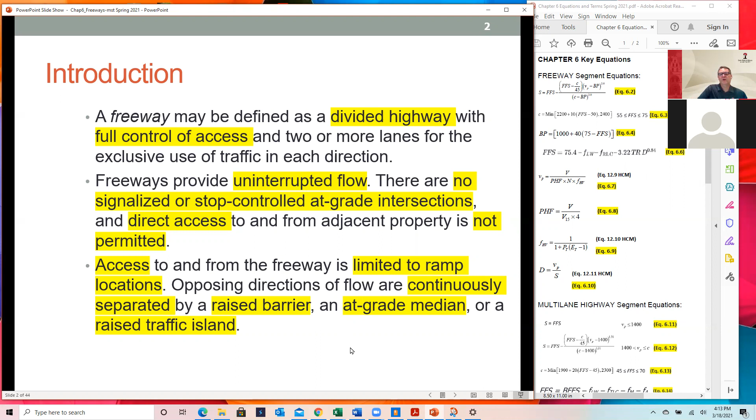And there are all kinds of design parameters as to when you have to use a barrier and when you don't.

So, what we're going to be looking at is the operating conditions of freeways. We're assuming all these cars are being driven by human beings. We've talked a little about autonomous vehicles and how that may be coming in the future, but chapter 6 is really all about operating freeways where you have human beings driving the vehicles. So it's the interaction among vehicles, drivers, and the geometric characteristics of the freeway, and we'll get into what some of those geometric characteristics are.

The operations on freeways can also be affected by environmental conditions. Obviously if it's raining, any of you who have lived in areas with more inclement weather than San Diego, people drive in bad weather conditions all the time and they're generally better at it than here in San Diego. If we get a little rain here, drivers get a little crazy because they're not used to it. They're used to driving in conditions like right now, sunny and beautiful.

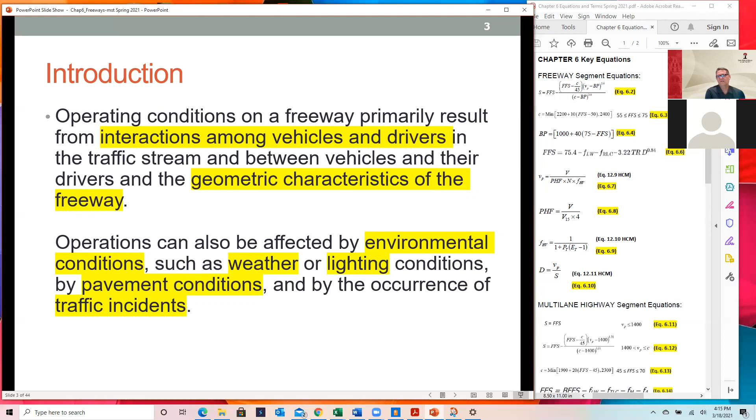Lighting conditions can affect freeway operations. Pavement conditions too, and pavement can be related to weather. The first rain after many months of no rain, the oils in the pavement come to the surface and it's slicker than normal. And finally, incidents, traffic incidents, accidents, stalled vehicles, anything unusual that impedes the flow of traffic. So there are 3 components of freeways that we're interested in evaluating.

The first is basic freeway segments. So those are the segments of the freeways not really influenced by ramps or weaving areas, which I'll describe in just a second. Basically, the longer stretches of freeways in between the interchanges where the vehicles are flowing.

Then weaving areas are segments of the freeway. I like the term weaving because I think most of us as drivers understand what that means right away, since we've all dealt with it. It's where two or more vehicle flows have to cross each other's path along the length of a freeway. So if you're in the right-hand lane on a freeway and the interchanges, the on-ramp and off-ramp, are spaced fairly closely, you've got vehicles jockeying for position, weaving back and forth through that right lane, some trying to get on the freeway and some trying to get off.

As it says here, weaving is usually formed when an on-ramp is followed by an off-ramp, and the two are connected maybe by an auxiliary lane. There might be an extra lane to allow for the weaving moves to be made.

Then merge and diverge areas, those are the points where on and off ramps join the freeway. The junction at that point is an area of turbulence because you've got vehicles flowing in different directions. And just a word of caution, every now and then when you look at, in particular, an off-ramp, as the ramp moves and diverges away from the main freeway lanes, the area in between the main freeway lanes and the ramp is often called the gore of the ramp, where the two come together.

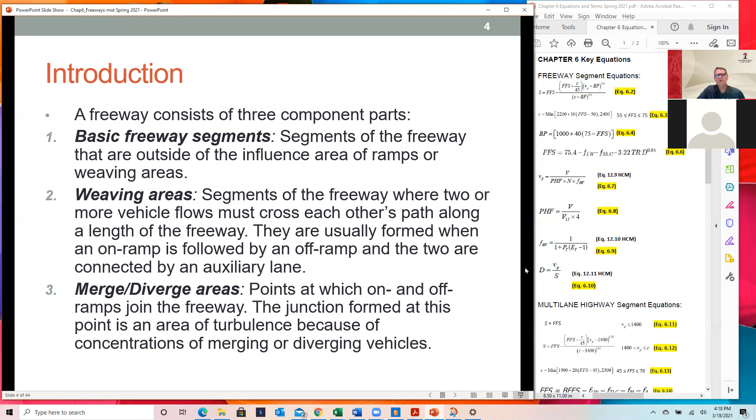Every now and then I see people pulling their vehicle over into the gore area of a ramp, whether it's because the vehicle is experiencing problems or maybe somebody's just pulled over to take a call. That is probably the worst place you can possibly pull your vehicle over on a freeway, because it's a decision point. We've all seen people make last-second decisions to either exit or, if a vehicle is exiting, decide they don't want to and drive through that gore point. So it's not a very safe place to be.

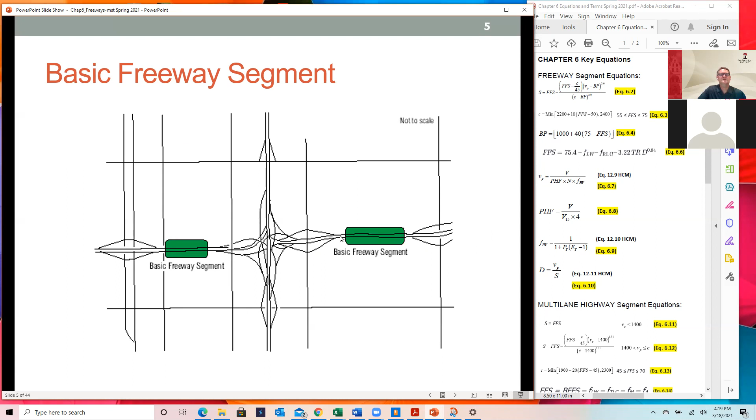So the way we measure performance of freeways is through three things. Density, which we've defined previously in terms of passenger cars per mile per lane, because we're talking about freeways. Freeways by definition rarely have just two lanes, one in each direction - extremely rare. If you find a two-lane freeway like that, it's probably temporary in nature, or it might be in a super rural area, but even then there's no passing opportunities. It's very rare to see a freeway that is less than 4 lanes, 2 lanes in each direction. So density is in passenger cars per mile per lane, speed in terms of mean passenger car speed, and volume to capacity ratio. These are the 3 things.

And so these measures kind of tell you how well or poorly traffic is flowing on that particular freeway segment.

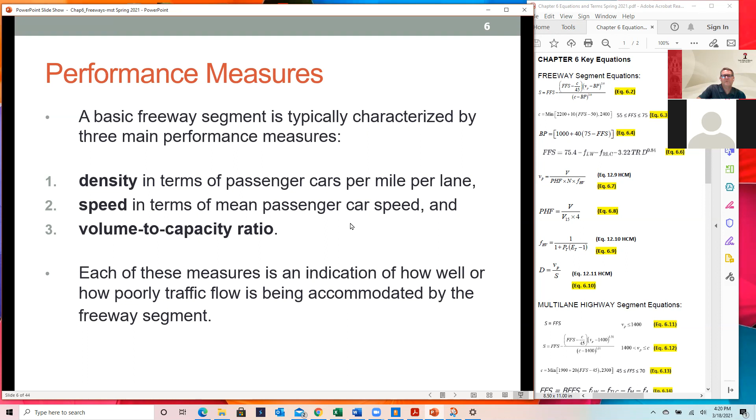Speed is an important indicator of service to drivers, but freedom to maneuver and proximity to other vehicles are also important. Think about yourself driving: if there are tons of cars in the lanes next to you, in front of and behind you, and the spacing feels closer than comfortable, you feel surrounded by traffic. That can impact your driving, and drivers tend to slow down because they get a little nervous under those conditions.

That relates to the concept of density. The more dense the traffic stream is, the more impact there's going to be on the speed and flow of traffic. Density increases as flow increases, up to capacity.

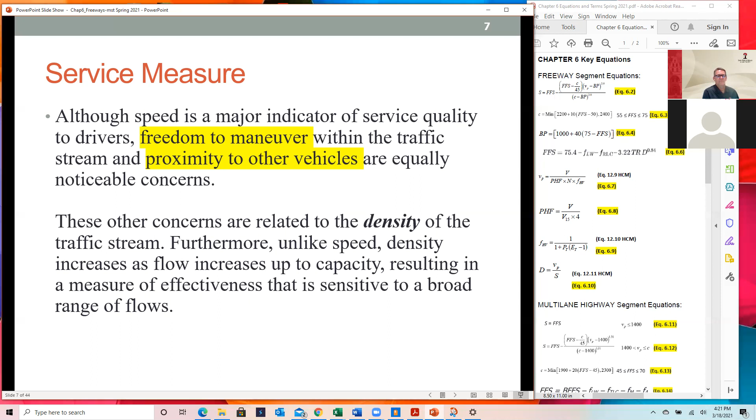This leads to the concept of level of service, or LOS. Maybe some of you have heard of this before, maybe not. Level of service is directly related to density, measured in passenger cars per mile per lane. Level of service A represents lower density, and level of service F represents higher density.

Level of service F means that demand for use of that segment of freeway exceeds its capacity - stop and go traffic. Level of service A is basically free flow with no impedance, with a density of 11 or less. Level of service B is still fairly good flow, and C is good flow on a freeway. As you move up, level of service D starts to show some congestion. Level of service E is very unstable, almost at capacity - just under it. And level of service F is just that, at or over capacity.

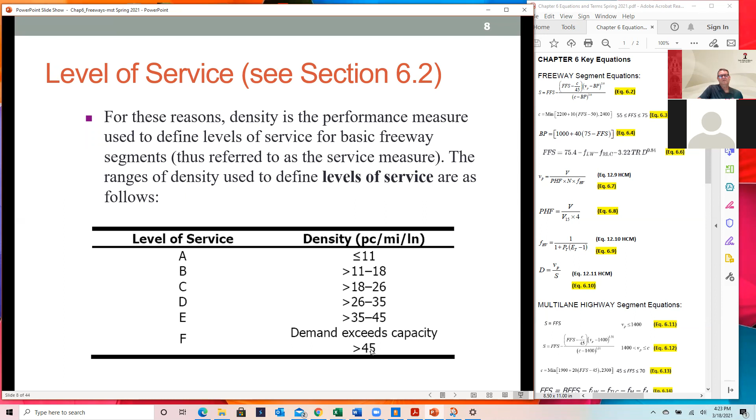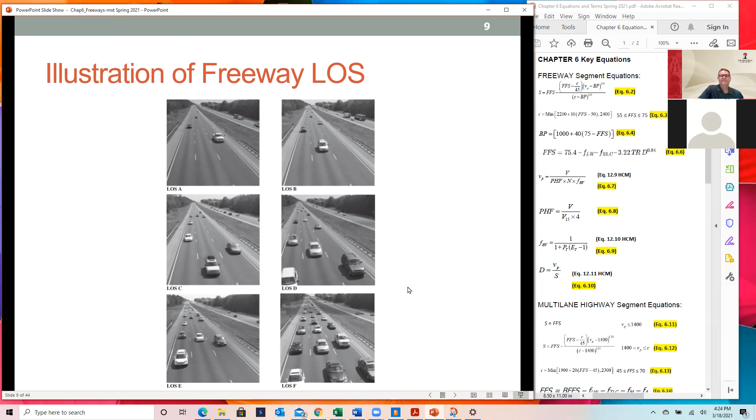So there are ways to measure the level of service and the capacity calculations of freeway segments, and we're going to go through the equations. Ultimately, you're calculating the density of the freeway segment so you can match it to the table for levels of service and determine the LOS, or calculate a volume to determine whether that volume can be handled by the number of lanes you plan for your freeway segment.

The first few equations listed here are the speed and flow relationships. There's a figure showing a breakpoint for the flow rate. If your flow rate is below the breakpoint, the speed used in your calculations just equals the free flow speed - meaning you're at a level of service that isn't impeding traffic flow.

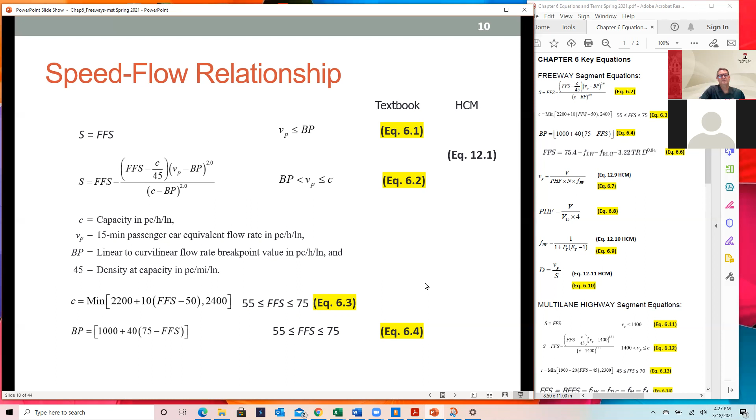Using this, if your free flow speed is between 55 and 75 miles per hour, there's a breakpoint equation you use. We'll go through some problems, but these are important equations to evaluate to calculate your speed, which will ultimately be used in a density calculation so you can determine your level of service.

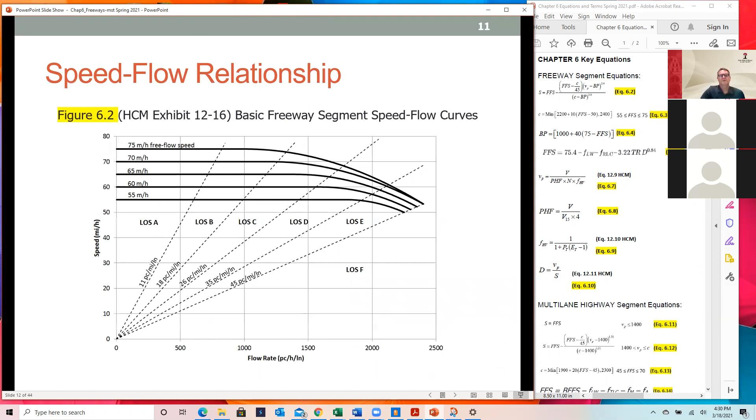On the exams, I generally provide both as an attachment, the table and the figure. You can decide which one you want to use. In the figure, you obviously have to do a little bit of estimating. In the table, you might need to interpolate, depending on what you have in your problems.

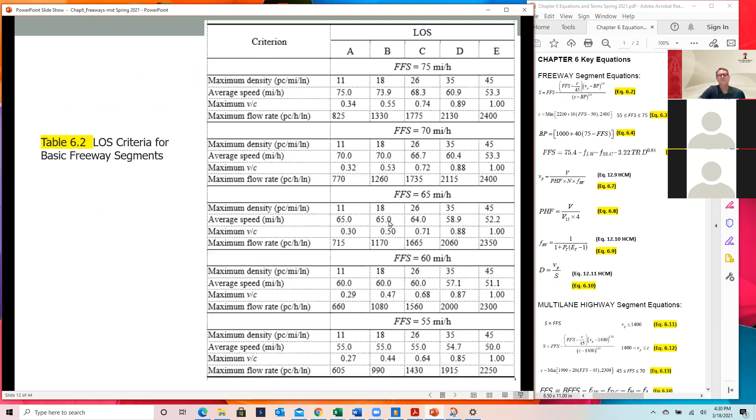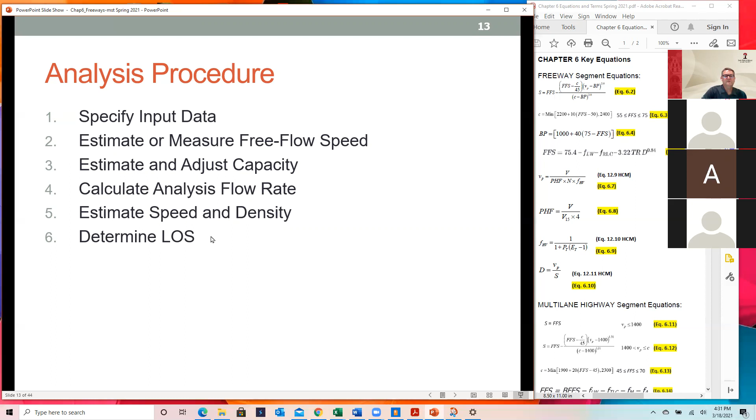So how do you go about doing the analysis procedure for freeway segments? You have to specify the input data, just like every problem. The first thing you do is figure out what your free flow speed is, then you need to consider capacity, and calculate your analysis flow rate. Then you estimate your speed and density, and finally from that density you can determine what your level of service is. We're going to go through all of this - this is just the basic.

This is also important: the equations we're going to go over are basically factors that actually reduce the speed based on things that have an impact on speed, but it's all based off certain base conditions. The base conditions for freeways assume lane widths are 12 feet, and the vast majority of freeway lanes you'll find out there are 12 feet wide.

There are some segments that have maybe 11 feet. It's pretty rare to find 10-foot lanes on a freeway, maybe in a really highly urbanized area where the right-of-way is very restricted, but generally not. The minimum right shoulder lateral clearance between the edge of the traveled way and the nearest obstacle is 6 feet, and a minimum lateral clearance in the median is 2 feet.

So the bottom line is, if you're dealing with lanes that are less than 12 feet, or a lateral clearance of less than 6 feet on the right side, you're going to have to modify your speed calculations downward, because narrow lanes or limited lateral clearance tend to slow drivers down. That's basically what you'll find as we go through this.

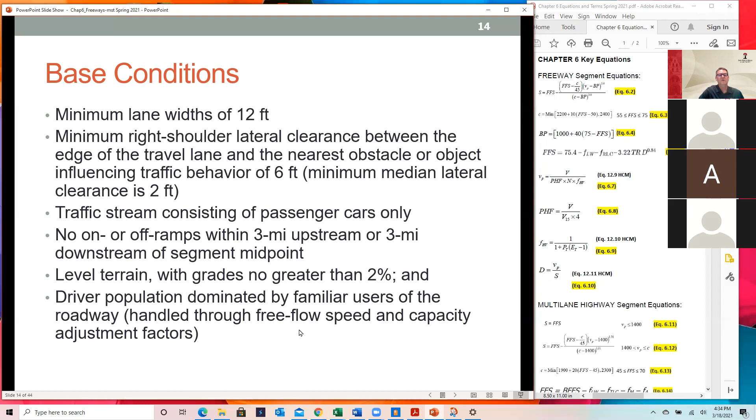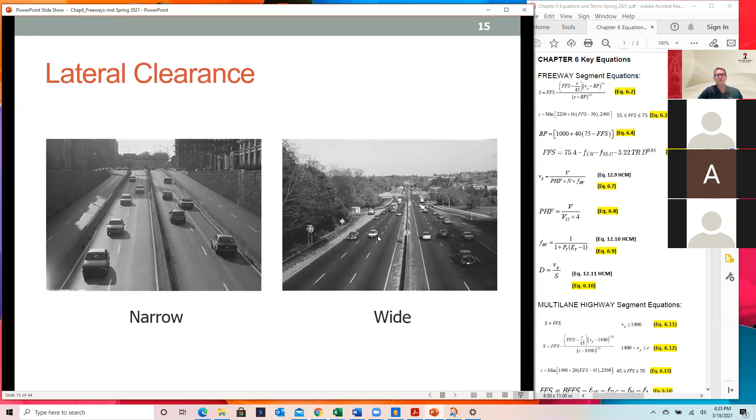So anyway, just a few photos to show what we're talking about. This is very narrow lateral clearance. On the right hand side, you can see there's a barrier just to the right of the traffic on both sides, and virtually no clearance from the center barrier. So these vehicles feel locked in pretty tight, versus this side where you've got a shoulder on the right and some clearance in the median as well. So these vehicles generally are going to feel a little more free flowing than those over there.

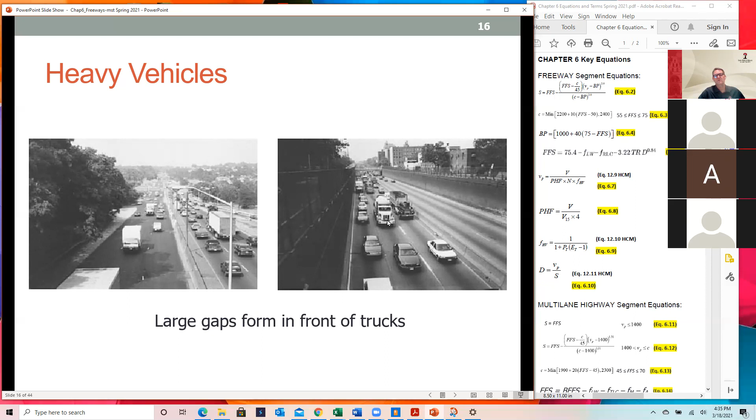Heavy vehicles, this is just an example. Especially in this photo, I think it's a good one - it shows large gaps forming in front of trucks. This is very typical: when you have large trucks, there are gaps in front of them in the traffic because they're slower moving than the regular vehicles.

So free flow speed is a concept we're going to use in the analysis of freeway segments. It's the mean speed of passenger cars measured under low to moderate flow rates. In other words, you don't have to be at level of service A, that first photo I showed you where there's hardly any cars at all, but you don't want to be at level of service E either, where there are a lot more cars, and all it takes is somebody flashing a sign or something to cause the vehicle flow to break down.

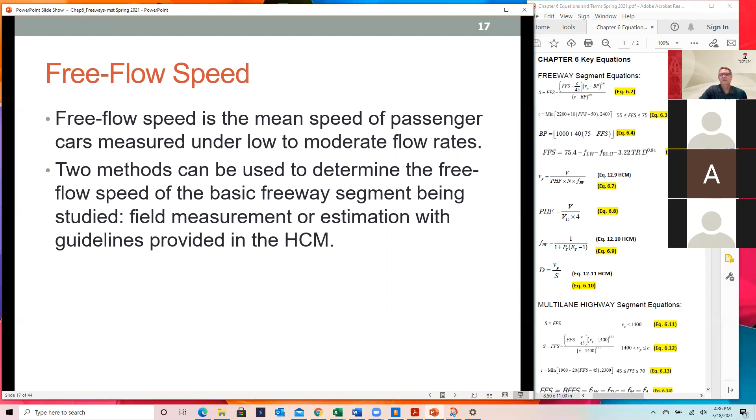There are two methods to determine free flow speed: field measurement or estimation with the guidelines provided through the HCM, the Highway Capacity Manual. I've already defined it, but just a reminder that when you see HCM, that's what it refers to. You might be working a problem where it says the free flow speed is X, assuming it's actually field measured. But there are other ways of defining the free flow speed, which we will go through.

Estimating the free flow speed is mostly what we're going to be doing in this section on freeways. You adjust the base free flow speed downward to reflect the influence of three factors: lane width, lateral clearance, and ramp density. All three of these will have an effect on the free flow speed - narrower lanes, lesser lateral clearance, and more ramps will generally cause the free flow speed to drop.

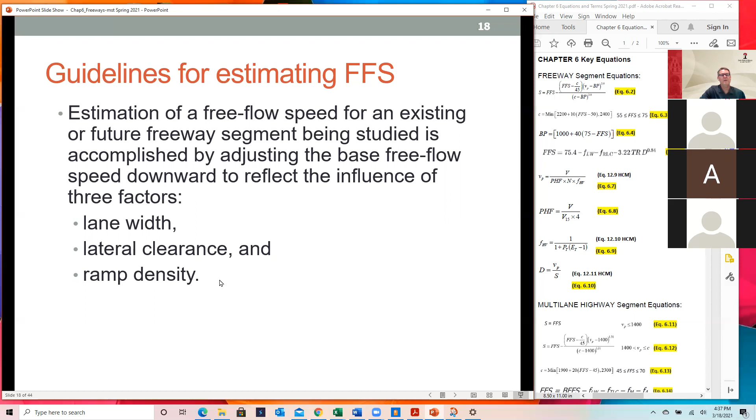So this is a very important equation, one that you will definitely be using. It comes right out of the Highway Capacity Manual, equation 12.2, but it's equation 6.6 in your book. This has been developed over many years of analysis and empirical observations, etc. So the free flow speed is equal to the base free flow speed in miles per hour, which is 75.4.

Again, kind of an empirical number that's what you'll use for calculations. There are places in this country, like Utah, where I think the speed limit's 80 miles per hour, a couple places where you actually have speed limits higher than this base free flow speed. But this is the equation, this is what you'll use.

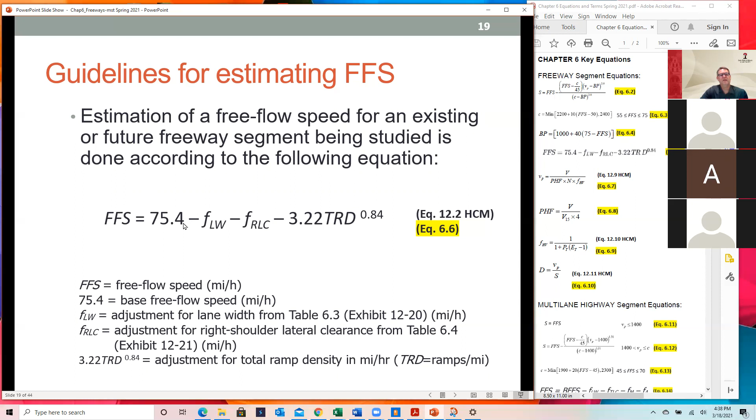There's an adjustment factor for lane width, FLW, and we'll go through these. Then an adjustment factor for the right shoulder lateral clearance. And then an adjustment factor for total ramp density, TRD. All of these are adjustments. You assume you start at this miles per hour, and based on these adjustments, you'll end up with a free flow speed of something less than 75.4.

So let's go through it. The first adjustment factor is lane width. It's very simple, table 6.3 in your book. It says if you've got a lane width of 12 on your freeway, you don't have to adjust it at all, the adjustment's 0. Remember, if you go back to the equation, that means you're subtracting 0, so it doesn't have any effect. However, if you have 11-foot lanes, you need to reduce the free flow speed by 1.9 miles per hour. And if you have 10-foot lanes, which in California are pretty rare, you have to adjust by 6.6 miles per hour. Not insignificant, this is almost a 10% reduction in speed because of lane width.

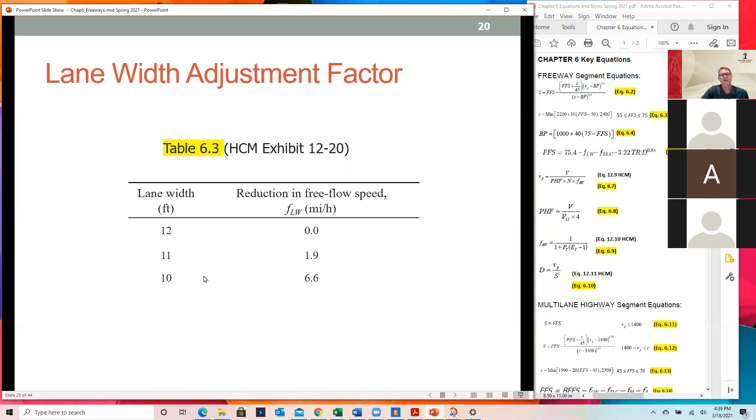Then you've got the lateral clearance factor. The reduction in miles per hour depends on the actual lateral clearance and how many lanes you have in one direction. Obviously, if your lateral clearance is more than 6 feet, it doesn't matter how many lanes you have, there's no adjustment. On the other hand, if your lateral clearance on the right-hand side is only 2 feet, you have to adjust by 2.4 if there's just 2 freeway lanes in one direction, by 1.6 if there's 3, by 0.8 if there's 4, and so on. You can take a look at this table, again pretty simple to apply this factor.

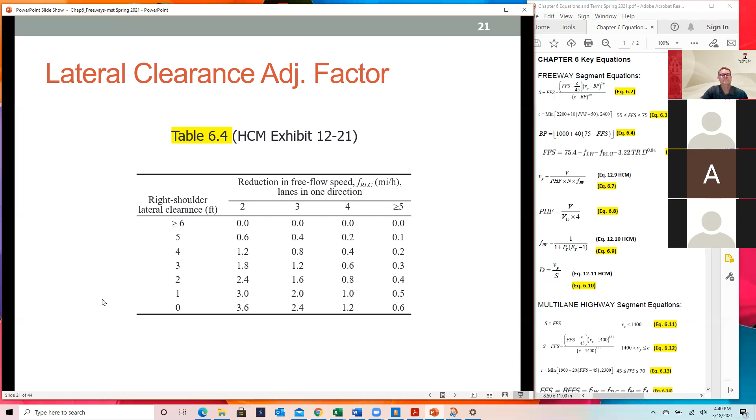The total ramp density is really a matter of just adding up the number of on and off ramps in one direction within 3 miles upstream and 3 miles downstream. Then you divide it by the 6 miles so you end up with the number of ramps per mile. So let's say there's 3 ramps 3 miles upstream and 3 ramps 3 miles downstream. You divide that by 6 and your total ramp density is 1.0, right? You've got a total of 6 ramps in 6 miles, just as an example.

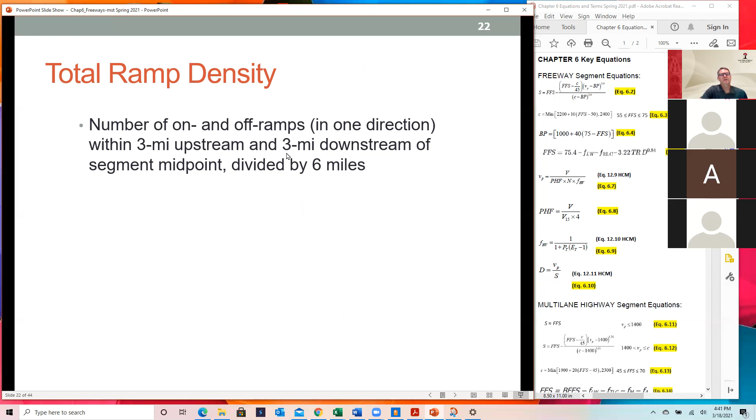So what you want to do is calculate your analysis flow rate. You'll see I've got a lot of these equations. They're listed over here, highlighted because these are the things you're going to need to use to do your calculations.

This V sub P is the 15-minute passenger car equivalent flow rate in passenger cars per hour per lane. V is the hourly volume in vehicles per hour, which is oftentimes a given, or you might need to calculate that - that might be the problem, asking you to figure out what the volume should be, but oftentimes it's given. The peak hour factor, we'll define these terms and you'll see how to calculate it in a second. N is the number of lanes in one direction, not in two - if it's a 4-lane freeway, N would be 2, because we're talking about traffic flow, which is directional. And then finally, there's going to be a heavy vehicle adjustment factor.

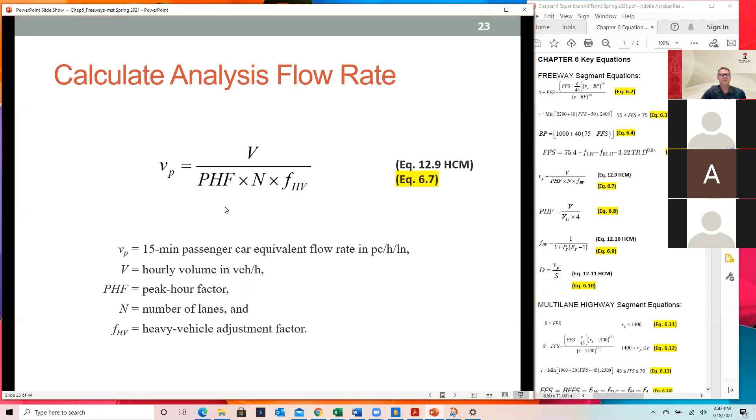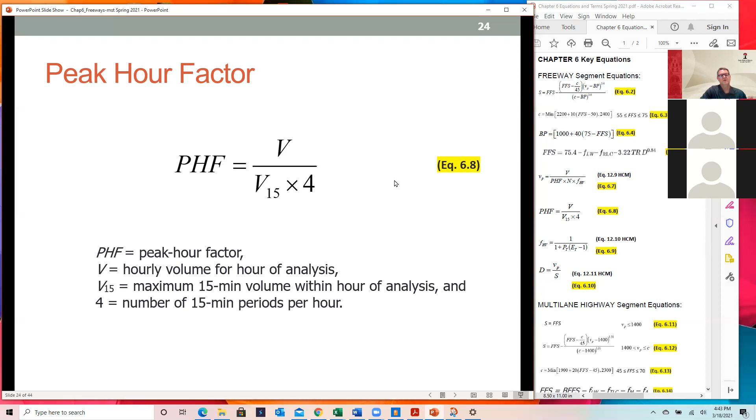So let's go through that. The peak hour factor is equal to the hourly volume divided by the maximum 15-minute volume within the hour, times 4. The reason this is done is because sometimes the hourly figure is a little misleading, since traffic doesn't necessarily flow at the same level throughout the hour. There can be a 15-minute period within that hour that carries much more traffic. So that's why you do this calculation.

And then there's a concept we use called passenger car equivalency, or PCE. It's a factor that's used because you need to account for a traffic mix.

Trucks and buses and RVs can have an impact on the flow of traffic. We all know that. You see it when you're out on the freeway, that the more trucks, buses, and RVs that are on the lanes, they can have an impact on how well the traffic flows. And particularly if you've got steep grades on your freeways, or steeper grades, that can have an impact.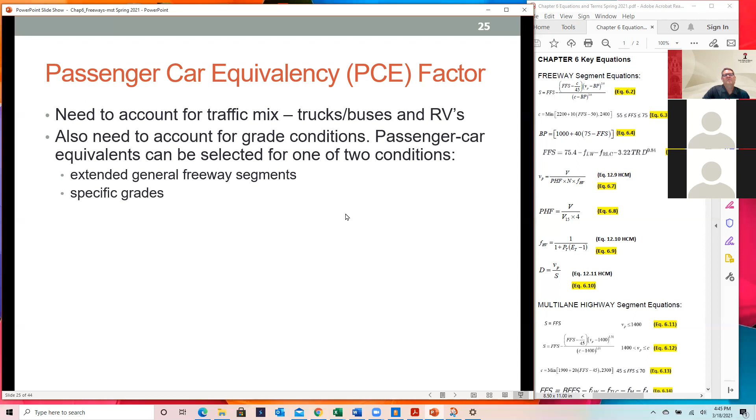So there's two different ways to account for this, and we'll do a problem with both. One is what they call extended general freeway segments, which are described as either level terrain or rolling terrain, and they're dealt with that way. Or once you get into steeper grades, there's more specific tables and data you have to apply, given the type and mix of trucks and the length and steepness of the grade. All of those can have an impact on this factor you'll see when we start doing the calculations.

Extended general freeway segments are where there's a number of upgrades, downgrades, and level segments. You can use these when no one grade is long enough or steep enough to have a significant effect on the overall operation of the segment. The guideline is the extended general segment analysis can be used where none of the grades of 3% or greater is longer than a quarter mile.

In other words, if you've got a grade of 3% or more and it's less than a quarter mile, generally trucks can negotiate it pretty reasonably. It's the long sustained grades that cause the problem. So when there's no one grade of less than 3% that's longer than a half mile - basically, if you've got a lower level grade uphill that's more than a half mile long sustained, that can have an impact on traffic and on the larger vehicles.

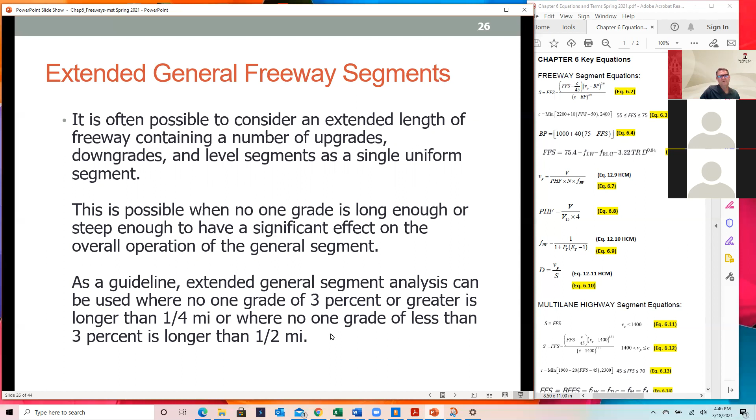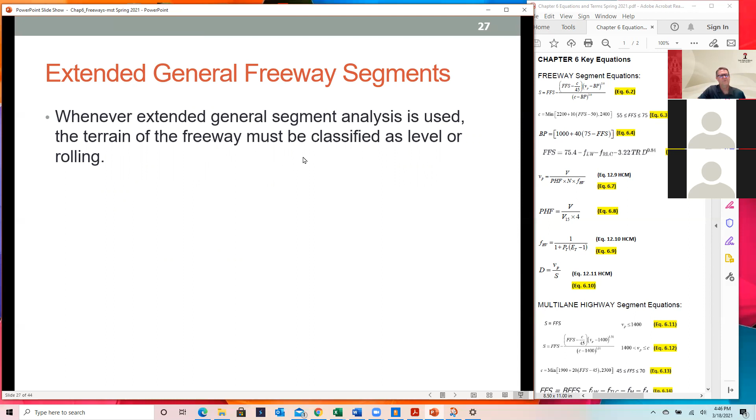Whenever extended general segment analysis is used, the terrain must be classified as either level or rolling, and that's usually given in the problem. Level terrain is any combination of grades and horizontal vertical alignment that permits heavy vehicles to maintain the same speed as passenger cars.

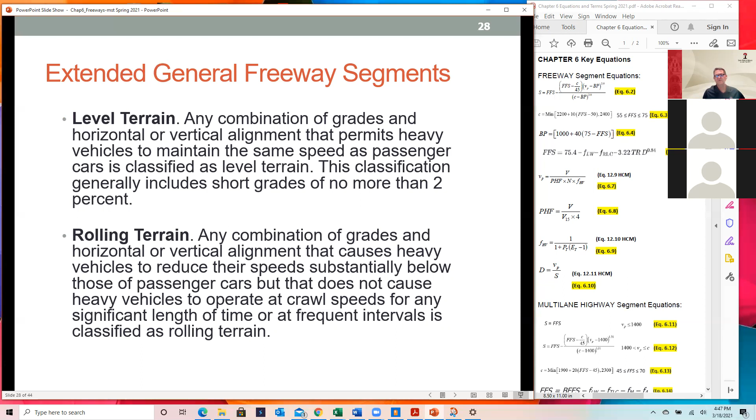Generally, short grades of no more than 2% are considered level. Rolling terrain is where heavy vehicles could reduce their speeds substantially below those of passenger cars, but it does not cause the heavy vehicles to operate at crawl speeds for any significant length of time. So rolling terrain will have an impact on the larger vehicles, but not as substantial as some of the longer, steeper grades - we've all driven on freeways where you've seen trucks that are literally barely moving.

So if you do have an extended general freeway segment, table 6.5 is super easy. If it's level terrain, the E sub T is equal to 2. If it's rolling terrain, it's equal to 3, and you'll put it into an equation I'll show you here in a moment.

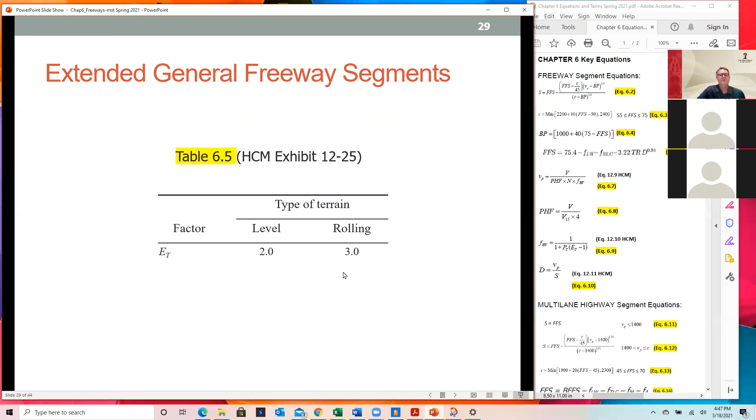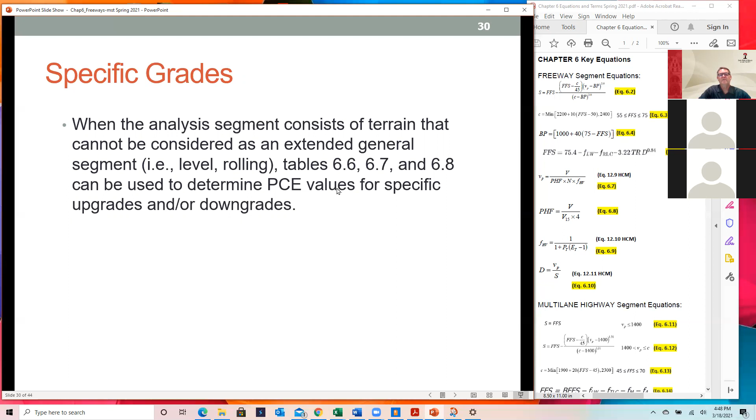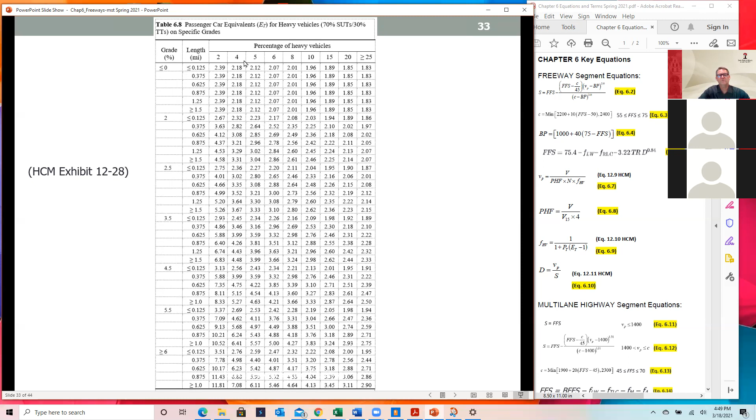Then there's another table - here it's the same thing, except the mix of trucks is different: single unit trucks are 50% and 50% tractor trailers. Finally, table 6.8 has a heavier percentage of single unit trucks versus tractor trailers. So you have to really look at your problem and determine the grade, the length of the grade, and the total percentage of heavy vehicles, so that you can find the appropriate factor.

So an average grade technique can be used for composite grades, or when all subsection grades are less than 4%, or the total length of the composite grade is less than 4,000 feet. So the bottom line is the problem will dictate how you apply that factor in.

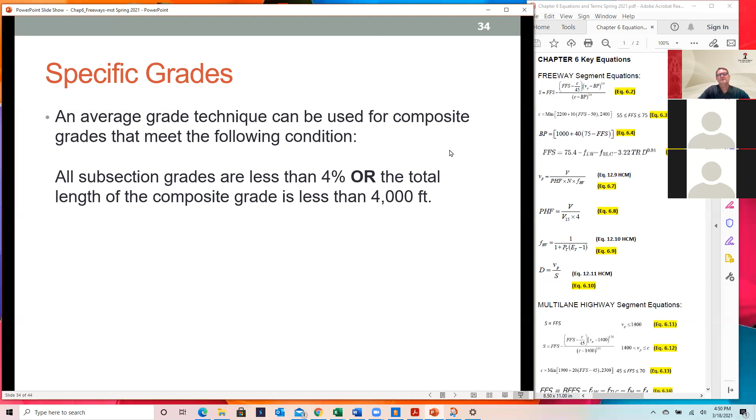And the heavy vehicle factor that goes into the equation is equation 6.9. What you have here are two things: E sub T, the passenger car equivalency for heavy vehicles, which you either get from rolling or level terrain, if appropriate, or from one of those three tables based on the information given in the problem. And P sub T is just the proportion of heavy vehicles in the traffic stream, usually given in the problem as the total number, sometimes broken down into single unit and tractor trailer. P sub T is the total of both.

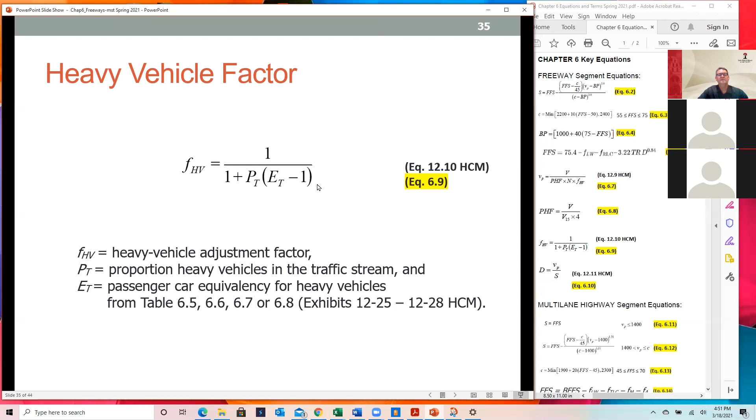Many times they just give you the percentage of trucks in total, without breaking it down between the two, and that's what you use here. So you do this calculation and put it into your equation, which is the equation back here. Let me find it.

This equation here, what equation is that? That's equation 6.6 over on the right: free flow speed equals 75.4 minus the lane width adjustment, the right lateral clearance adjustment, and the total ramp density adjustment.

And then when you're calculating your flow, you need to use equations 6.7, 6.8, and 6.9 to be able to calculate your flow. What you're trying to get to at the tail end of all of this is equation 6.10, your density calculation, which is your flow rate divided by your average passenger speed. This is either your free flow speed, or the speed if free flow speed is not what you use here, and we'll go over that in a couple of problems. But this is the final equation we have in the freeway segment.

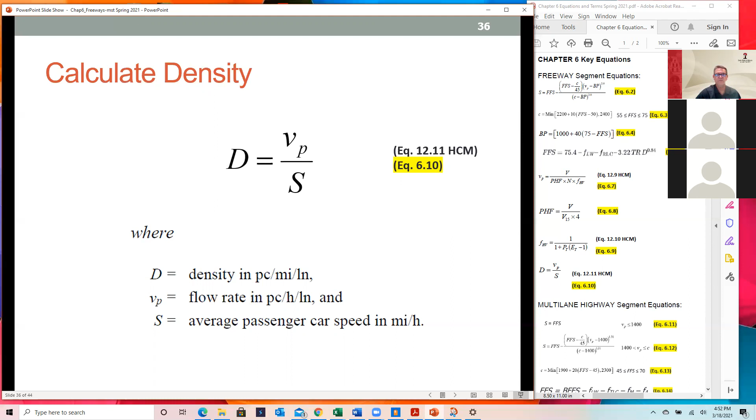So what I want to do now is a couple of problems, and I think it'll make it very clear how all of these different equations are applied. Before I go on to the examples, the first one being example 6.1, does anybody have any questions on the material I've covered so far? Okay, I don't see anything in the chat. So this will start making a lot more sense once we go through a couple of examples.

So the first one, 6.1, is a 6-lane urban freeway, meaning 3 lanes in each direction, on level terrain. So you now know that in this problem you are not going to need to worry about those specific grades, right? It's just telling you it's on level terrain. But it's also telling you it has 11-foot lanes, and there are obstructions 2 feet from the right edge of the traveled pavement, so you know both of those things are important in terms of modifying your free flow speed.

And there are 9 ramps within 3 miles upstream and 3 miles downstream of the midpoint of the analysis segment. So you've got 9 ramps, and remember, however many ramps you have, you divide it by 6 miles, because there's 3 miles upstream and 3 miles downstream. So 9 divided by 6, you end up with a factor of 1.5.

Then it tells you a directional weekday peak hour volume of 3,000 vehicles is observed, with 810 vehicles arriving in the most congested 15-minute period. So basically 3,000 is V, and 810 is V sub 15. So that's something to keep in mind as well.

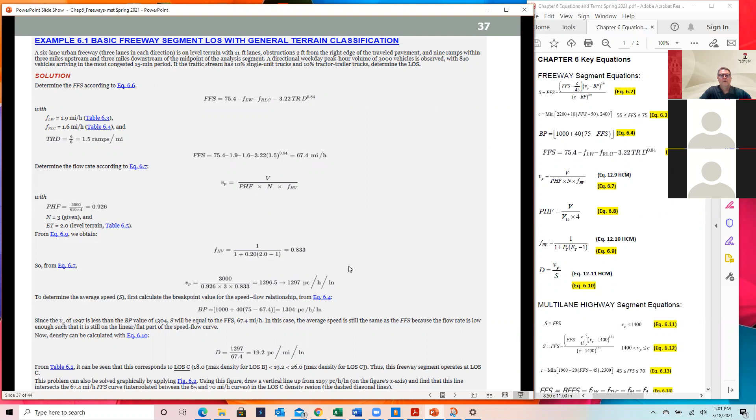Now example problem 6.2 is a good one to follow that up with, because it uses some of the same data, but it changes things a little bit such that you have to use those tables to look up your values for the heavy vehicle factor, and your flow exceeds the break point, so you have to use equation 6.2 in this problem. So it changes things a little bit, and I think it shows you the difference between the two of them.

So the problem says, consider the freeway and conditions from the previous example that we just went over, 6.1. At some point further along the roadway, there's a 6% upgrade that's 1.25 miles long. Now that's big—6% is a very steep grade for a freeway, and it's over a mile long, so that's very long. All other characteristics are the same as in example 6.1.

So under these conditions, what is the level of service? And then it also asks you how many vehicles can be added before the roadway reaches capacity, assuming that the proportion of vehicle types and peak hour factor remain constant. We'll get to that, but let's focus on the first part, which is to calculate our level of service. Then we'll go over that last part.

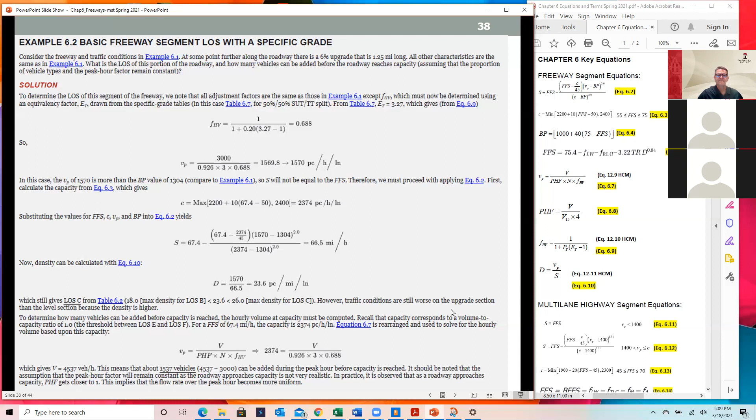Okay, I've got one more problem here just to emphasize things. It's one of the practice problems with blanks in it, and I'm just going to go through this one real quick.

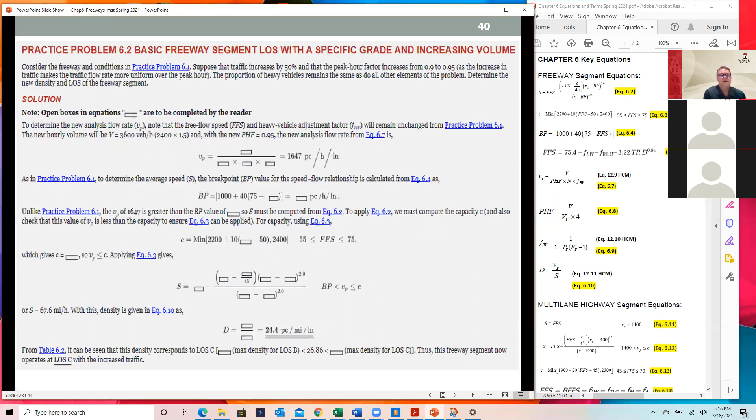But in any event, what you can see from this is that in this particular problem, you end up with a flow rate that does exceed your breakpoint. So therefore you have to go back to equation 6.2 for your speed, and then your density calculation and your ultimate designation for your level of service.

So I've kind of thrown a lot at you in this. As I said, this is important stuff. This is really basic to transportation engineering in this chapter.

And on Tuesday, when we go over multi-lane highways, you'll see a lot of similarities. Some of the factors are exactly the same for multi-lane highways, but there are definitely some differences in the analysis between the two. So we'll go through it, and then I'll be able to assign the homework.

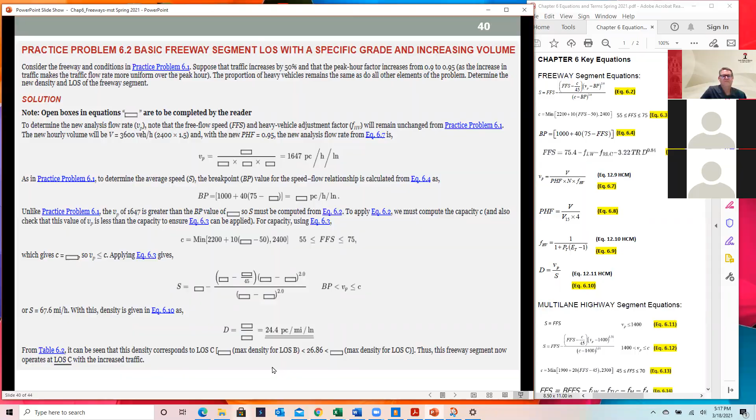I had a question regarding the homework.